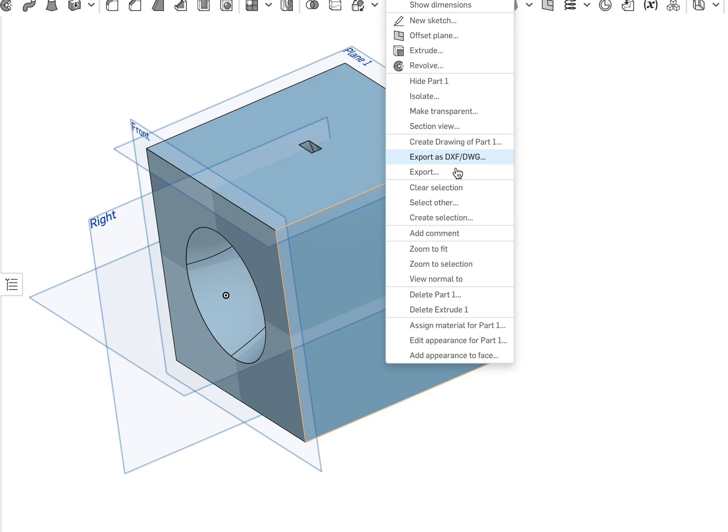If we look at it from the side view here, trying to see if I can do a section view on the iPad—doesn't look like it. So I'll have to show it to you on the computer version here real quick. This is the desktop version, just so you can see what the inside looks like. This isn't super important, but if I cut into this, you can see how I have that smooth curved shape from a square hole for where my phone speaker could be to a big circle on the other side for where I want the sound to come out of.

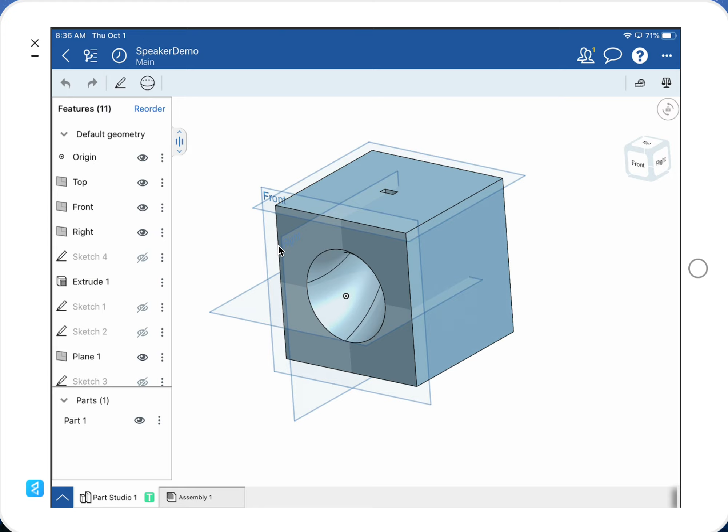Now, this design is going to use way more plastic than what we would like it to use, so I suggest you use this just as a guide to get started, not necessarily something to follow step by step. So I'm going to start a new part studio down here, just for the sake of keeping it all together in one file.

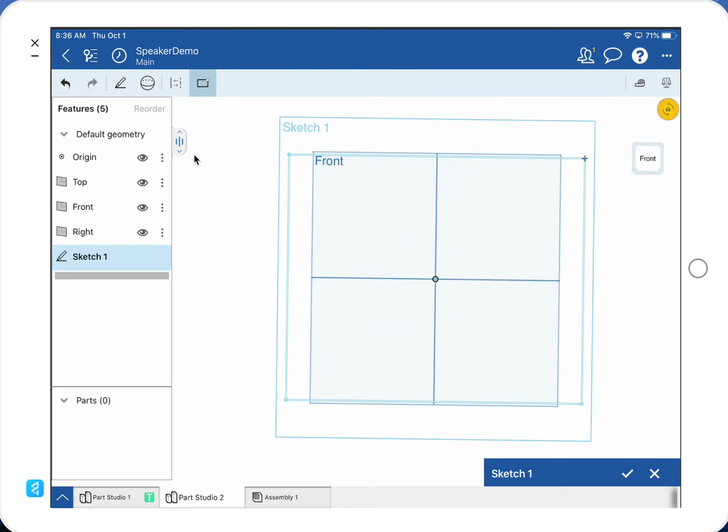The first thing I'm going to do is just make a big cube that I'm working off of. So I'm going to start a sketch on the front plane, and view normal to sketch plane. Now I want the center, or origin, to be the perfect center of my cube, so I'm going to do a center rectangle off of the origin and drag it out. Like I said, I'm making this fairly large—more plastic than you'd actually want to use—but I'm going to make a 5 inch by 5 inch cube.

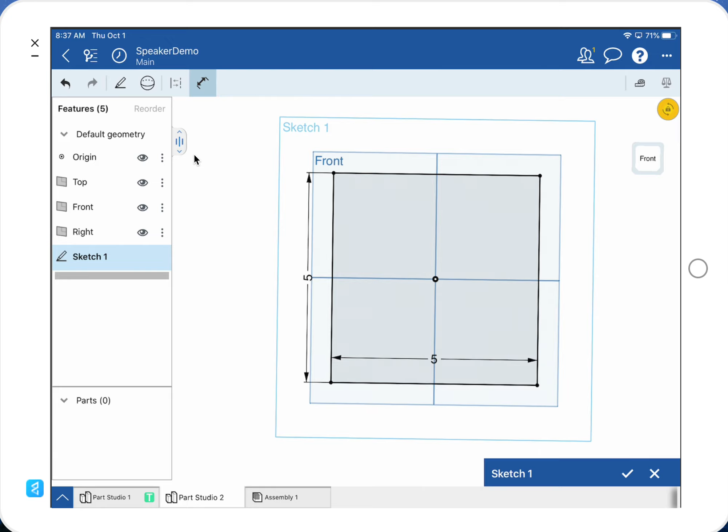And then I'm going to extrude this back. I suppose I'll just extrude it back 5 inches as well. Like I said, I want that origin to be in the front. Sure, we'll just make it one big cube. There we go.

All right, so now I'm going to start with the loft steps. This actually takes 3 pieces. If I look back at my part studio from before, you can see I've got 3 sketches on the side here: I've got my front horn, I've got the path that we're going to follow, and then I've got my square at the top.

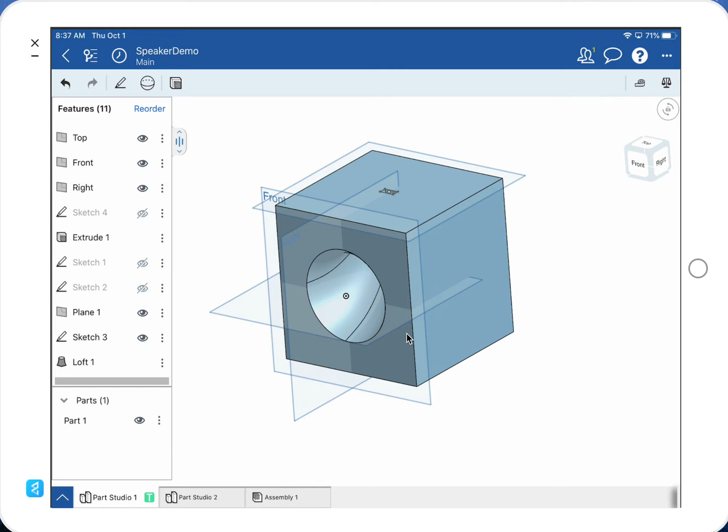So I'm going to make that front hole first. I'll start a new sketch on the front face, view normal, and just make a circle—this can be whatever shape you want for your end horn, I'm just doing a circle for the sake of the problem. I'm going to give it a dimension, let's say 4 inches. Perfect, done with that sketch.

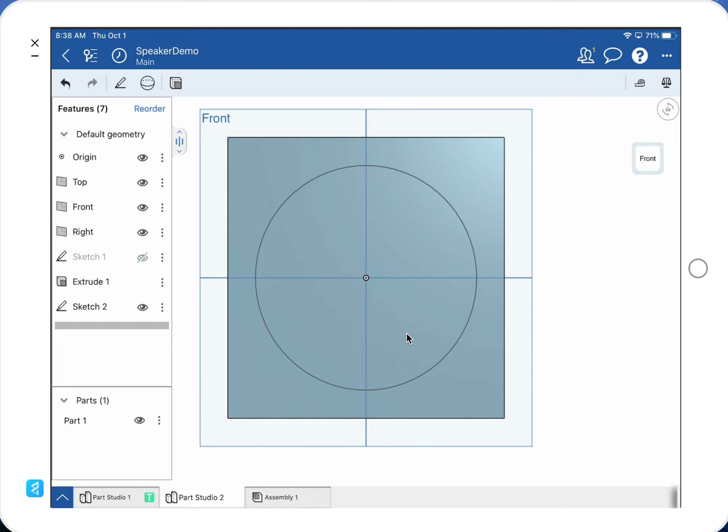Next, I'm going to make my path, and this is definitely the tricky part. I'm going to start a sketch on the right plane. Now the reason this is important too is I need to be able to see that origin, and that needs to be the exact center of my sketch. If you're not working perfectly on the origin, what you'll need to do is use the 'use' function that's in here—right there, like we did in the Onshape modules 4, right? So we want to use the center, because the path that we make needs to start right there.

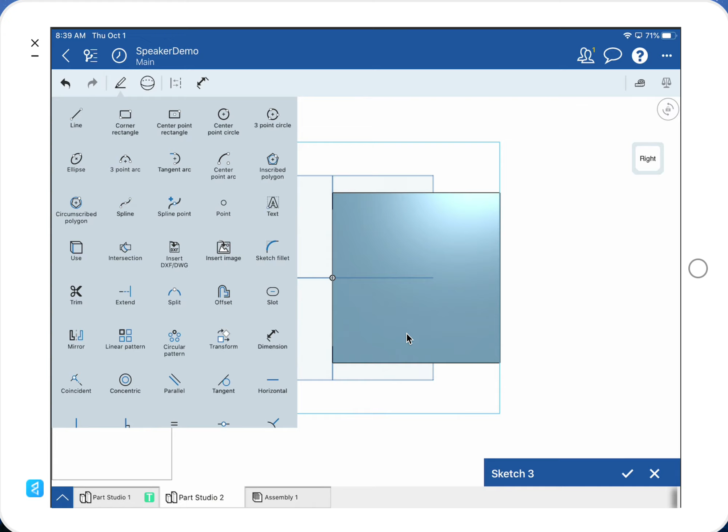So I'm going to make an arc, a 3-point arc. I need to start it at the center of my circle, and I want it to go all the way up close to the top, but not all the way to the top. Oh, not like that—let me undo that. I didn't want the curve to go backwards, I want it to go forwards.

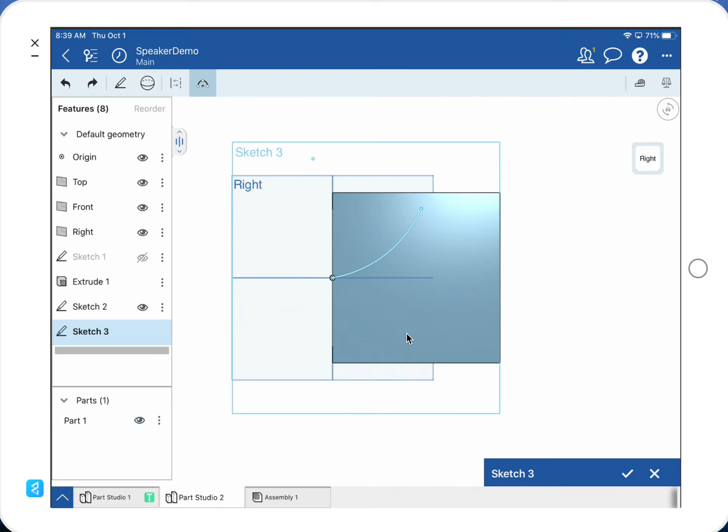That's close enough for now. So I'm going to draw a little vertical line on top of that, going straight up like that. Let me undo... there we go. The reason is we have to make these tangent because there's kind of two pieces to it.

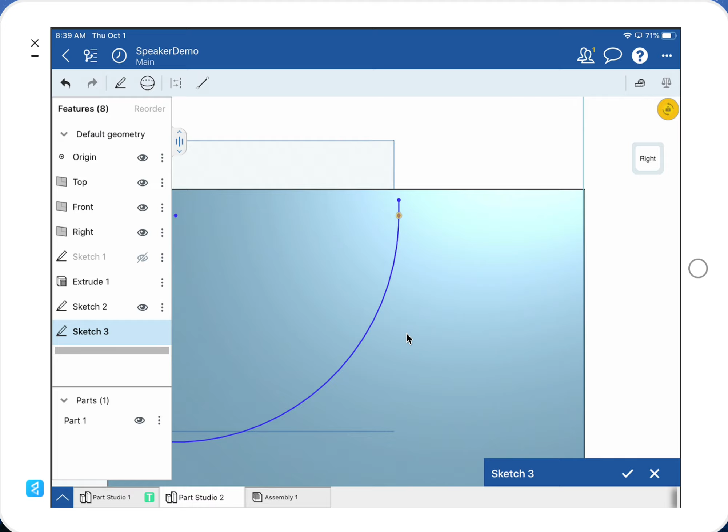One, we want the end of our path to be perfectly vertical, and two, it has to be perfectly smooth. So what I'm doing here is making it so that the very top has a way to be perfectly vertical. The next step then is I need to put that point on the very top line.

So I need to make those coincident on each other, like that. Now lastly, you can kind of play with these and try to get it to be a curve that you like. As long as it's smooth, it's good. So once you like how it looks—I don't want it to go down below at all, so I'm going to put it right there.

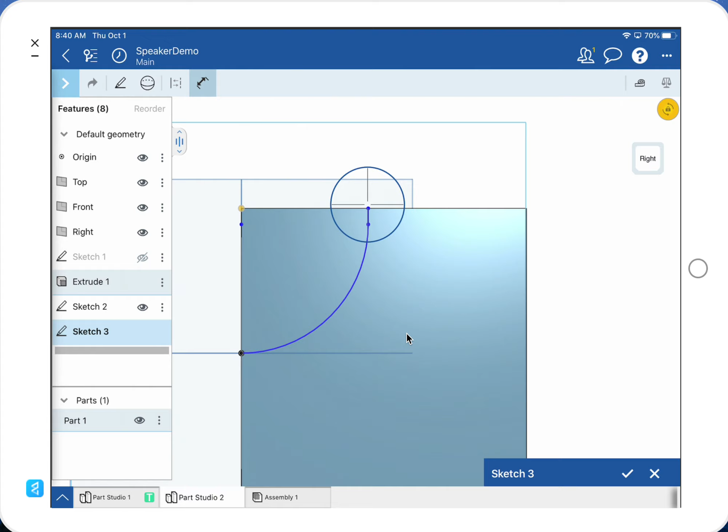Again, this could affect your design, right? The end there is the center of where your speaker sits. So you might need to add some dimensions so that you can reference to it later as well. Maybe from there to there, maybe on your speaker that has to be exactly 2 inches. I don't know—let's make it 2.5, just so it goes back a little farther.

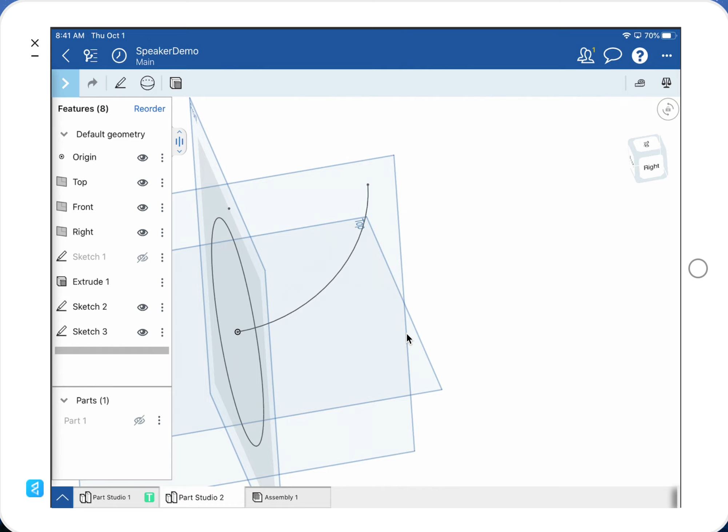Perfect. All right, so next I need to make—so I've got my center, I've got my path. Next, because I'm already perfectly at the top, I'm going to make my other sketch. Now, if you are making this as a separate horned piece, you need to have a plane at the end of that point. So imagine you're just this far, you don't have anything except for this—you need to make a plane at the end of that point. This is if you're making it as a separate horn, otherwise skip this part. I need to make, not a sketch, but a plane at the end of that point.

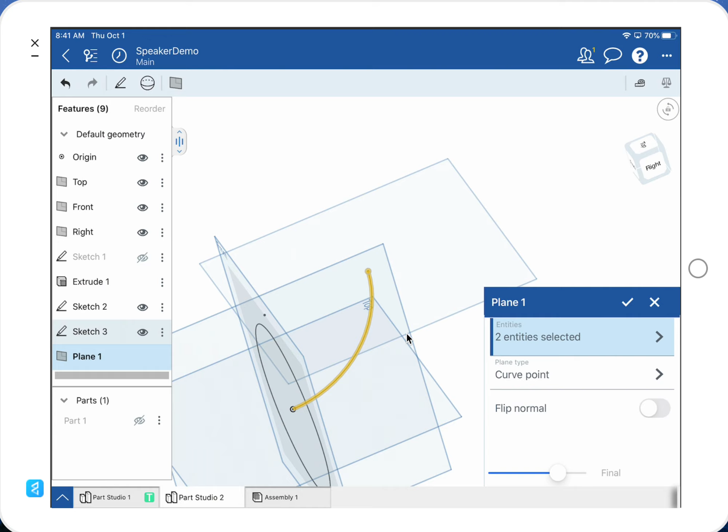You guys remember doing the curve plane, or the curve point? That was at the end of the line for the mug, the handle of the mug. We picked that point at the end of that line, and it should make a plane perfectly perpendicular at the end there. Now, again, we don't need to do that on ours because we've already got that set, right? And then, just like before on the mug, you could use the use option to project that single point so you can get the center down.

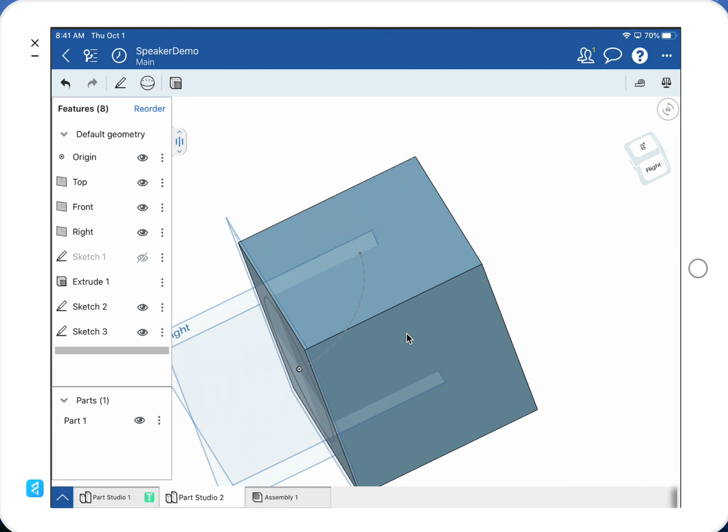All right, so now I'm going to start a sketch just on top of my box. View normal to sketch plane again. So I'm sideways, that's okay.

So I'm going to draw a center point rectangle with that point as the center. But it looks like I need to use the use function, being on the iPad, so let me go back. I need to use that point, right? Because that's where my path ends. So I need to be able to make sure that my rectangle ends perfectly on that point.

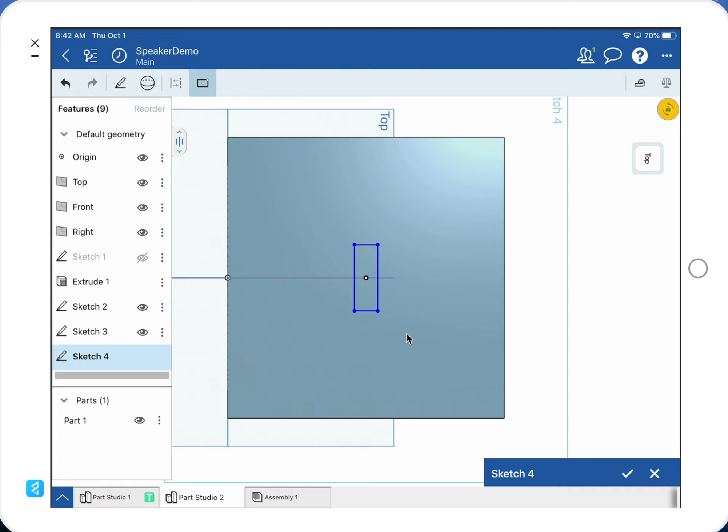From here, I can put my hole, and this is going to be the size of the speaker on my phone at the bottom, right? We want to make sure it's relevant dimension. So let's estimate—I'm going to say this is about 1/8 of an inch, so 0.125.

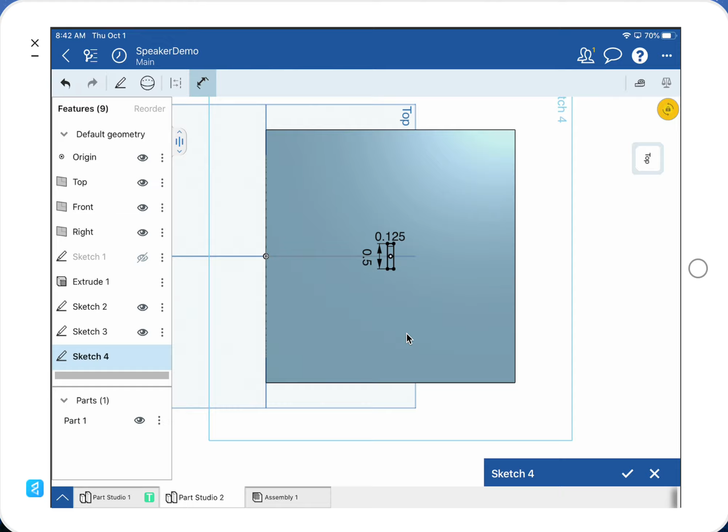And we're going to say that maybe it is half an inch wide. Again, this is going to be different for each of your phones. There's my little speaker for my phone. Done with that sketch. All right, and now we're finally ready to loft.

I'm going to turn these planes off so we can see a little bit clearer. We've got my horn at the end, my speaker hole at the top, and the path that it follows. So, like I said, this looks like a sweep, but it's actually a loft operation.

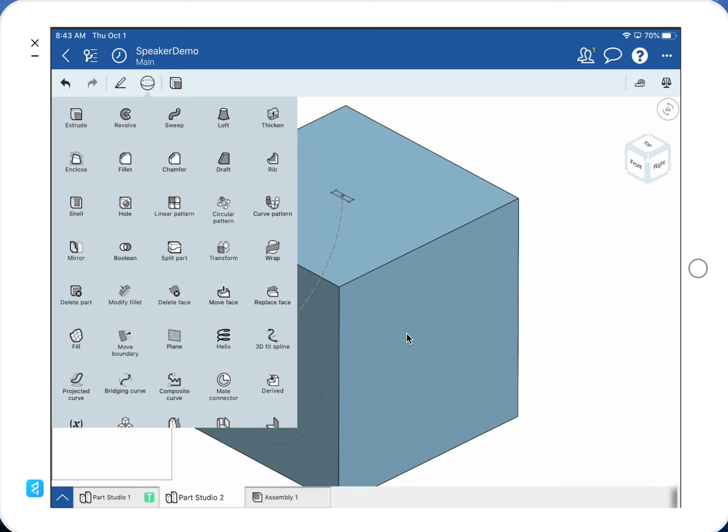So in the features menu, I'm going to pick loft. I'm going to go from the circle at the front to the rectangle at the top. And then I need to select down here the path, and I need to turn that on. And I want that path that we created.

Now, I don't want to click here. I want to click on the sketch itself, so clicking sketch 3. The reason is that we've got 2 lines there, right? So we need to be able to select both of them. Oh, it selected it as a profile. Let's go back and remove that.

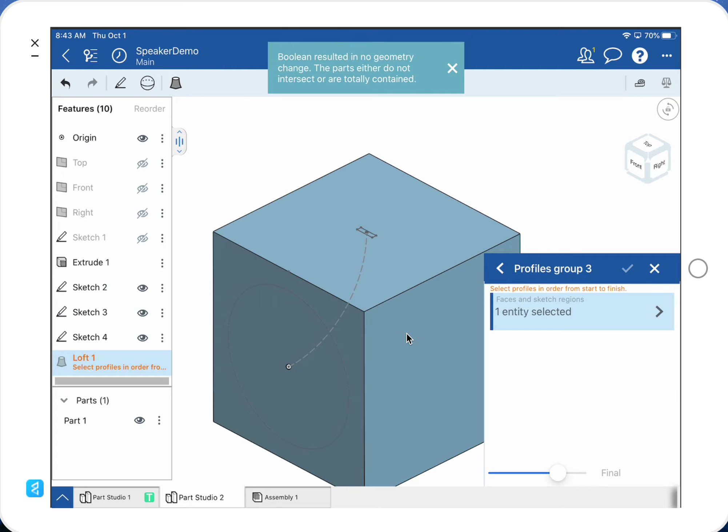So the path I want right here, that's the path. I want the full sketch 3, not just the single line, right? Because we had it set right now as just, right, we've got 2 different lines on there, so we need both of them. All right, it looks like our profiles are set.

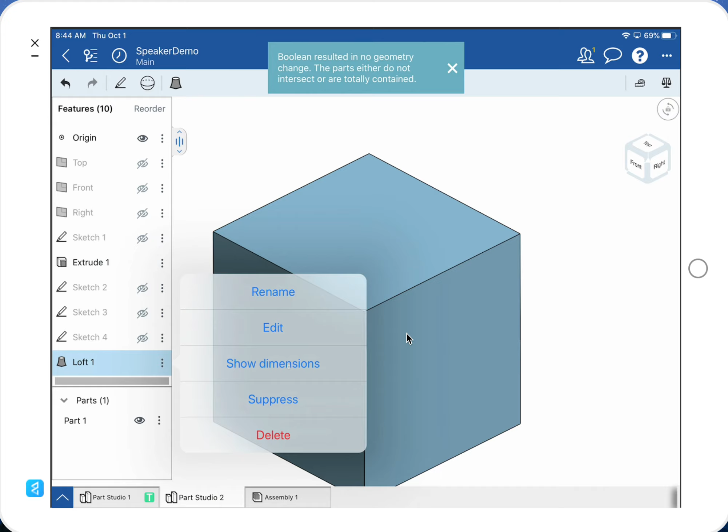Our path is set. We should be able to just check it and see. Oh, we have it set as an add, though. Let's go back. So we don't want to add material there, right? We're trying to remove material. And there it goes.

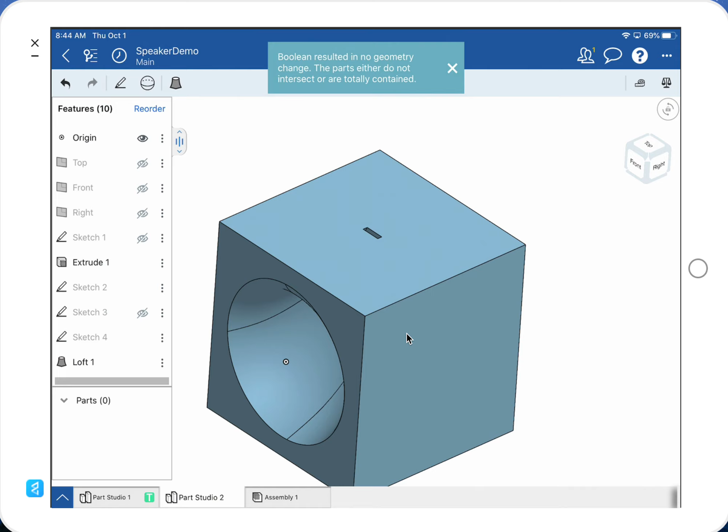So now we've got our big horn on there. So now suppose, I'm going to break this just briefly. I'm going to delete this big rectangle. Actually, no, I can't delete the rectangle. Let's just hide the part. And instead, let's make this a new part feature.

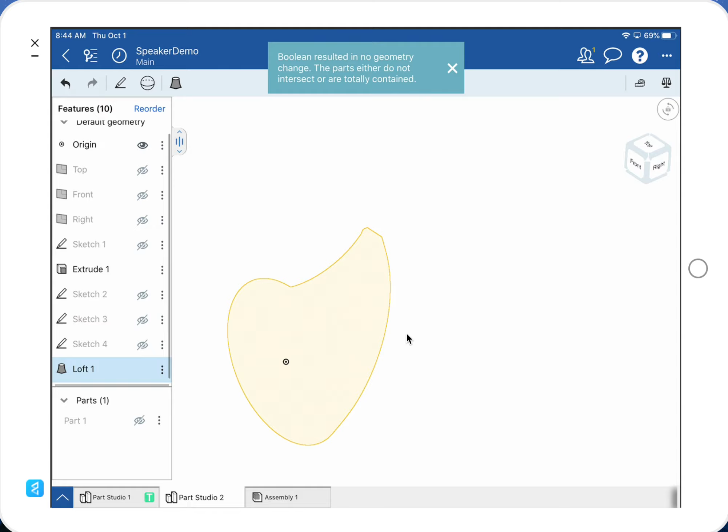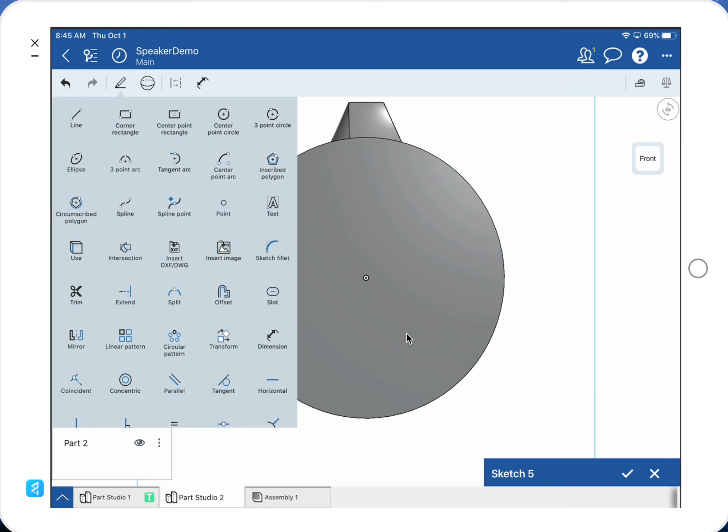Okay, so imagine that we were making just like a horn on it, right? Like we were trying to make a megaphone. What I would have to do from here then is I would have to make another sketch on here. I could make another circle, basically essentially just repeating the steps, right? We don't need to make the path again because the path is going to be exactly the same. I could start another sketch on top of this rectangle here.

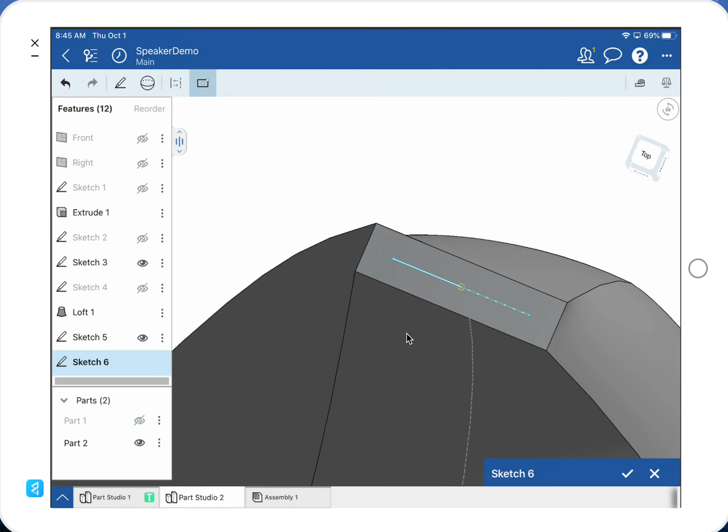I want to turn on sketch 3 so we can see that center. And then I need to use that center. Then do another center point rectangle. Again, you should probably throw dimensions on here. I'm just doing this quick for reference.

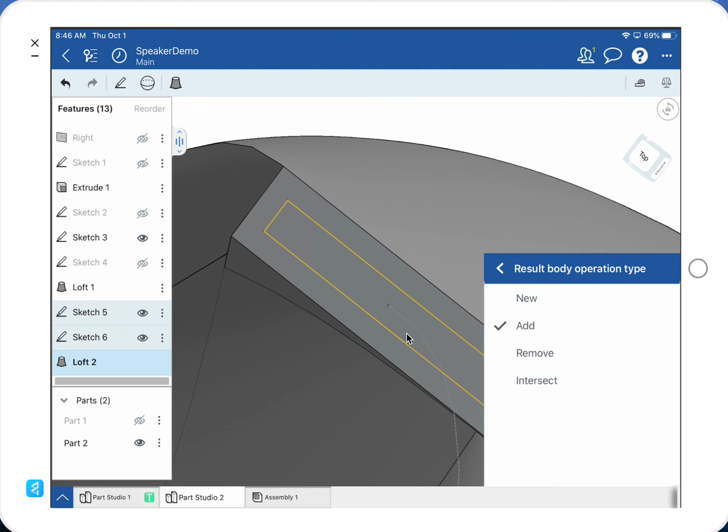And then from here now I can just do a loft again. So the first one gave me my shape. The second one is going to give me my cutout then. Make sure we've got all this correct. This time it would be a remove. We would have a path. That path would be, again, sketch 3.

There we go. So now you see how it's cut out. And again, because of how we had it set, we have it really thin, so it made some holes in it. But that's the gist of how you can make some sort of horn shape. You could also just use an extrude or sweep as well, but here's a way you can make kind of a curved path. If you have any questions, let me know.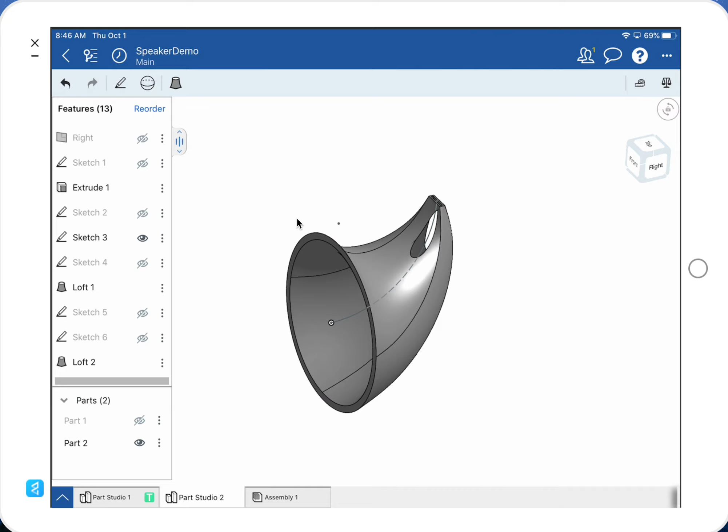The last thing to mention is that if you wanted to make it like a curved sketch for some reason, it's going to be really tricky to do it that way, like curving in 2 dimensions. So saying that suppose your speaker hole was like over here off to the side, it's curving up and to the side. There's a way to do it, but it's going to be tough. So I can help you figure that out if needed. Best of luck to you guys.